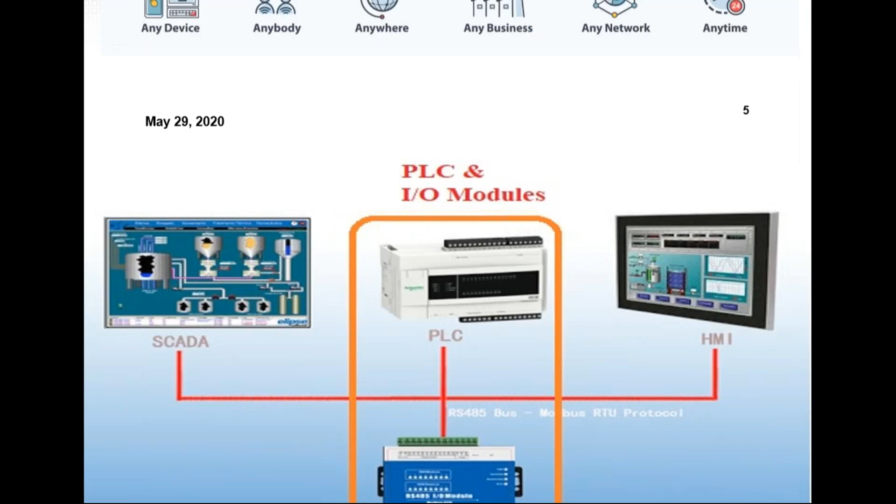Now let us see the conventional industrial automation systems which are in operation up to today. Majority of these sensors and actuators are connected with the PLC through hardware. If we want to monitor this whole operation, we can monitor either in HMI or in SCADA systems. So majority of the control is done at the local end.

So now, because of the introduction of IoT, this particular conventional industrial automation can be converted into IIoT. So what is IIoT?

In IoT, these industrial automation systems can be connected with a Wi-Fi module, also called the IoT gateway module. Through this module, we can transfer data anywhere in the world, to computers or mobile systems, so we can monitor and control from anywhere.

There are many cloud providers available, like ThingSpeak, Google, Amazon, IBM, and many other service providers. So this is the overall structure, or basic components, of industrial IoT.

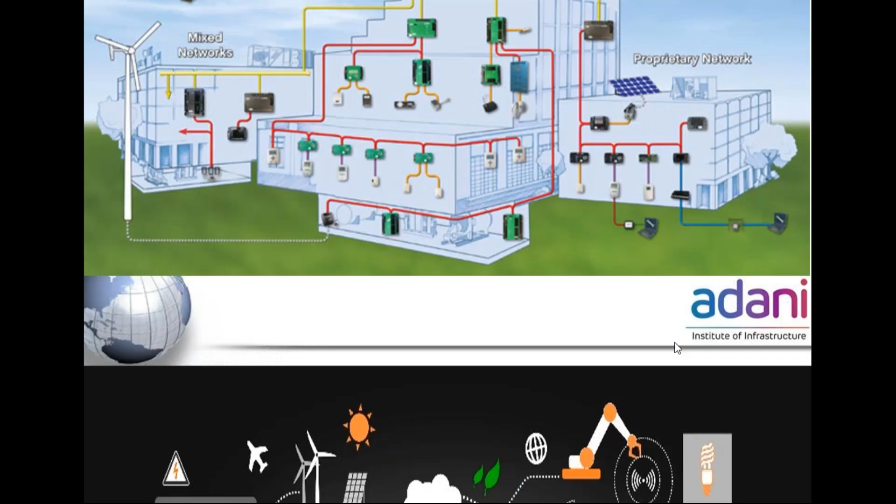We can also have industrial automation. In industries, we can control each and every parameter using this technology. We can control the whole production line from anywhere, monitor quality control, handle inventory management, continuously track and monitor, and also track logistics and different parameters. These are the applications of IoT in industries.

With this, we will be exploring in detail in this webinar. Next, IoT can also be helpful in the healthcare sector, like in this corona pandemic.

It can be very much helpful. We can order anything like medicine, contact doctors from anywhere, order medicines, and monitor patients from anywhere in the world. These are the different benefits of IoT in the healthcare sector.

Ultimately, if we are implementing IoT in healthcare, we can have the doctor at our doorstep. We can call the doctor from anywhere in the world, and we have the major advantage of these disruptive technologies.

Next, IoT can also be used in robotic applications. Nowadays, robots are frequently used in industries. These robots, using IoT, can be controlled from anywhere in the world. These are the potential advantages of IoT.

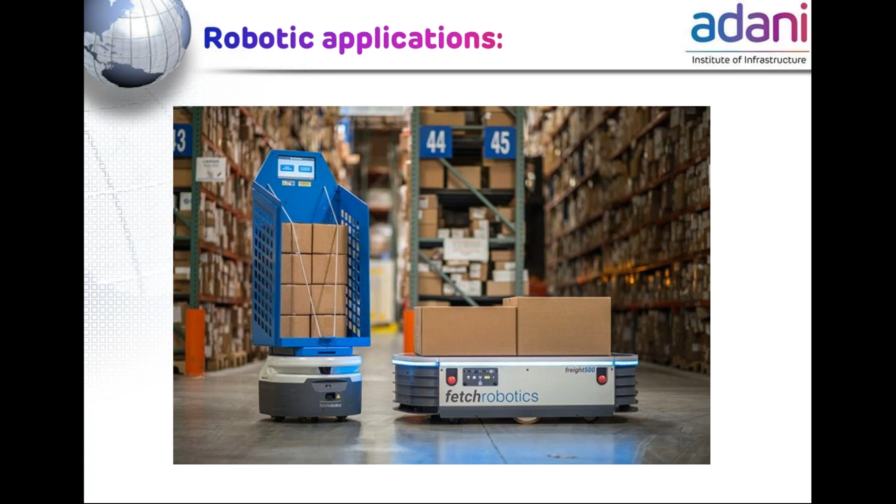So these are the different applications of IoT. It can be used in home, building, industry, healthcare, IoT devices, robotics applications, and many more.

So now we will see, up till now we have seen what is IoT and where it can be implemented. Now we will see the potential benefits of IoT. We can monitor and control anything from anywhere in the world, making our life much easier. Ultimately, the major advantage of IoT is increased productivity.

And we can have the global connect, right? So ultimately, each and every process will be optimized using IoT. So simultaneously, we should also analyze the risk, as whenever we are using any new technology, we should also analyze the risk associated with it. So which are the risks which we must need to consider?

I thought of playing a video. Let me just try it out. I hope the audio is not coming out at your place, so I'm skipping this.

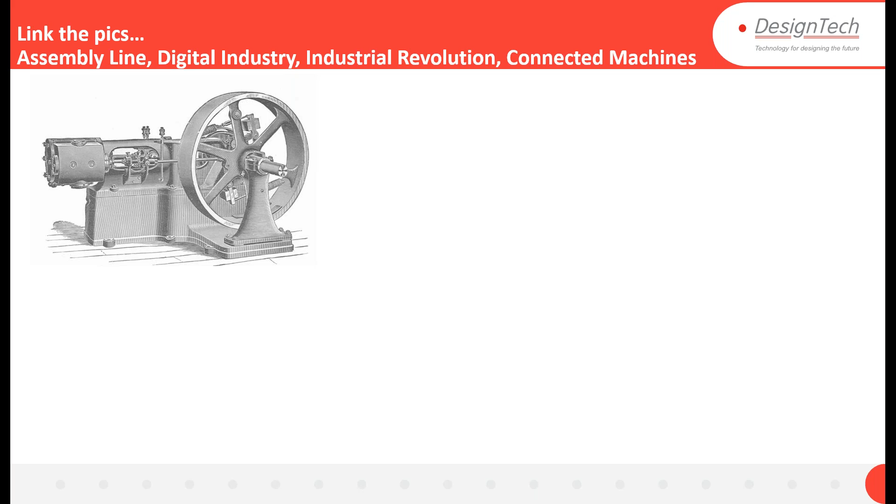You're having some pictures here. You can just answer yourself, no need to tell me. You're having something called an assembly line. You have something called a digital industry. You have industry revolution and connected machines. So which one is the topic here?

For example, the industry revolution. The first one is the industry revolution, after that came the assembly line. Industry revolution is man invented the wheel, and the machine is Industry Revolution 1, and Industry Revolution 2 is assembly lines. Later on came digital industry, where CNC machines or NC machines came into picture with Industry Revolution 3, and 4 is the connected systems.

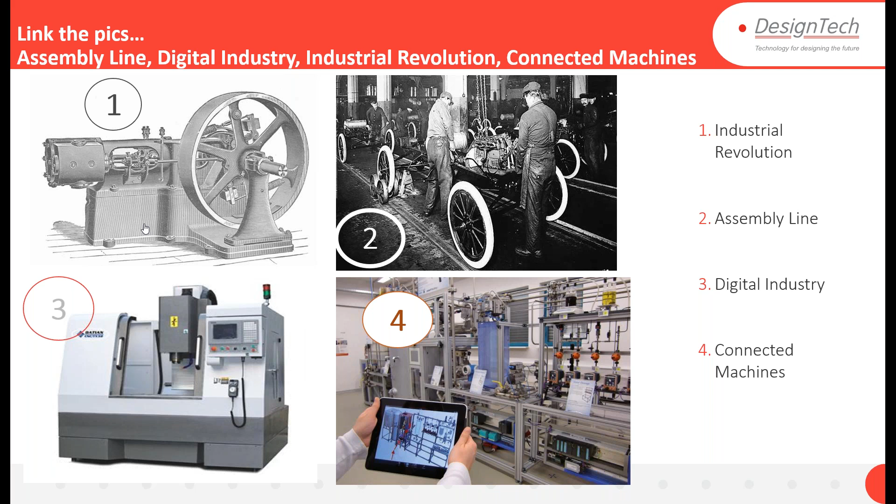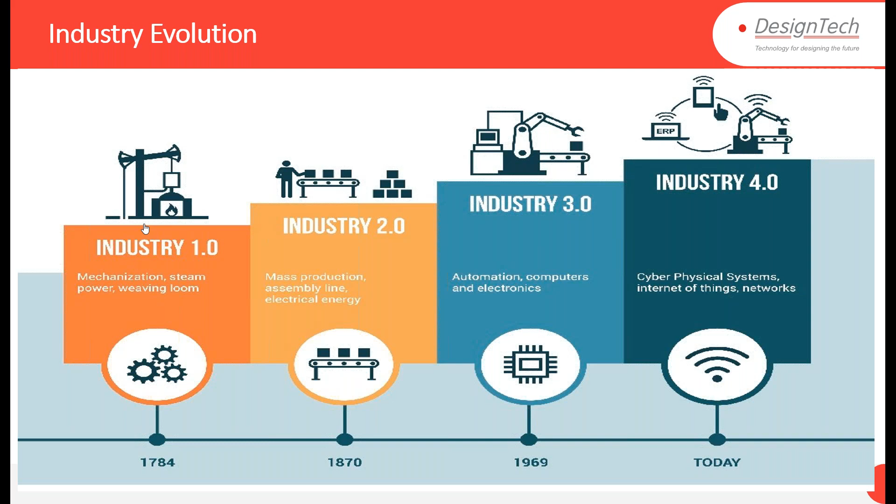Now today we are trying to discuss more on this 4th area, which is the connected systems. So this is somewhat in short about industry evolution, industry 1.0, 2.0, 3.0 and 4.0. Every time the industry revolution has come with some world wars, but good, industry 4.0 is nothing like that. We are trying to just work with cyber physical systems, Internet of Things and networks. So this is what we are trying to work on today, that is industrial Internet of Things or industry 4.0.

So the 4th industrial revolution, we try to say we are witnessing profound shifts across all industries, marked by the emergence of new business models, the disruption of incumbents, and the reshaping of production, consumption, transportation and delivery systems. So whatever Ujjwal Patel sir has told, it is a similar thing, but in a simple format. There's a definition I can give about what is Industry 4.0.

And products are changing. Earlier we used to call a product very good and all, but today we are trying to call it smarter because they are able to listen to us. So before we understand what we want to do, we are able to tell them, and before I understand, they are trying to do it. So that is somewhat what we are trying to use, called smart connected products. So where data analytics, design for connectivity, additive manufacturing, augmented reality, these are some of the things which are coming out.

As per various studies, Industry 4.0 is real-time high data volume availability through multilateral communication and interconnectedness between cyber physical systems and people. Where digitization and new technology, when we are trying to merge these two processes - people think that just connecting two systems is called Industry 4.0. No, that is called digitalization only. When we are trying to include some new technologies here, like manufacturing technologies, then we call it agile manufacturing, or Industry 4.0.

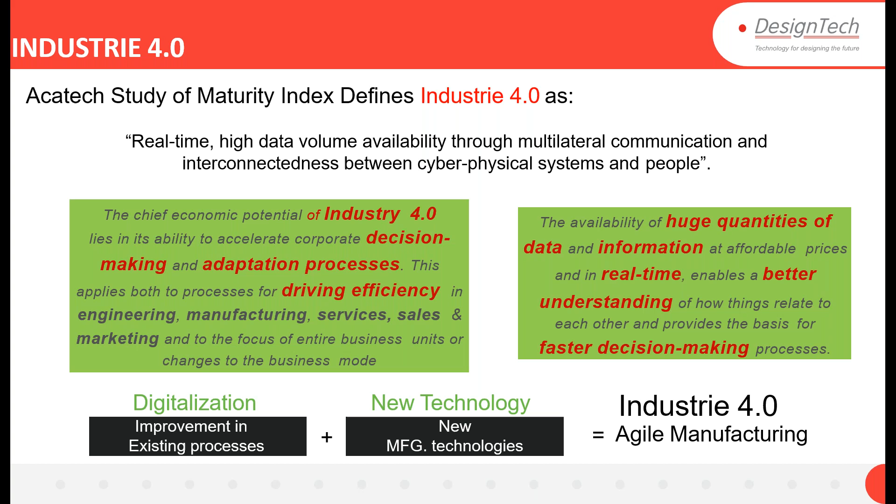In short, you can just look for yourself. Before lockdown, work from home was not really happening in those days, before March or so. Now we are having some special packs called work from home packs, which have been introduced by most of our service providers, and we are trying to consume each and every bit of data. So that is what data is getting consumed today, that is what we are trying to work with.

And the challenges and manufacturing expectations are rapidly transforming because workforce productivity has to be increased. Increased productivity and the operation complexity is going up day by day. Capacity utilization, that is each and every asset optimization, has to be done.

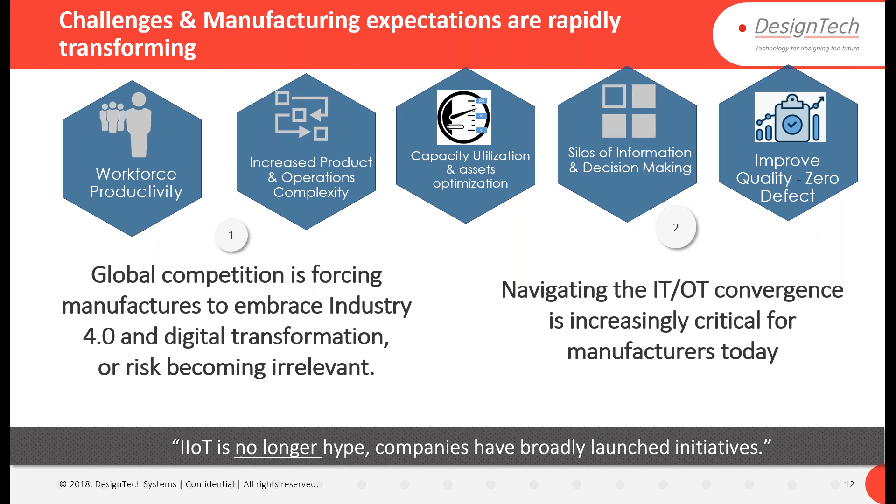With Industry 4.0 and navigating towards IT-OT convergence, we are trying to work today with the latest technologies. IIoT is no longer a hype, and companies have to start working with IIoT, Industrial Internet of Things. Every part of the country is coming out with smart manufacturing, as it's called in the US, or Industry 4.0 by Europe, and Made in China 2025 by China. About 33% majority of companies are coming out with IoT economic value. This is what factories are setting up today.

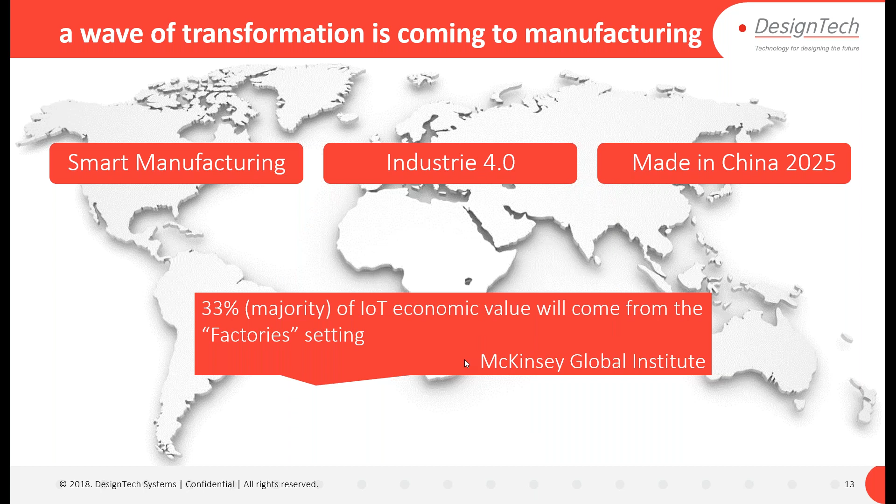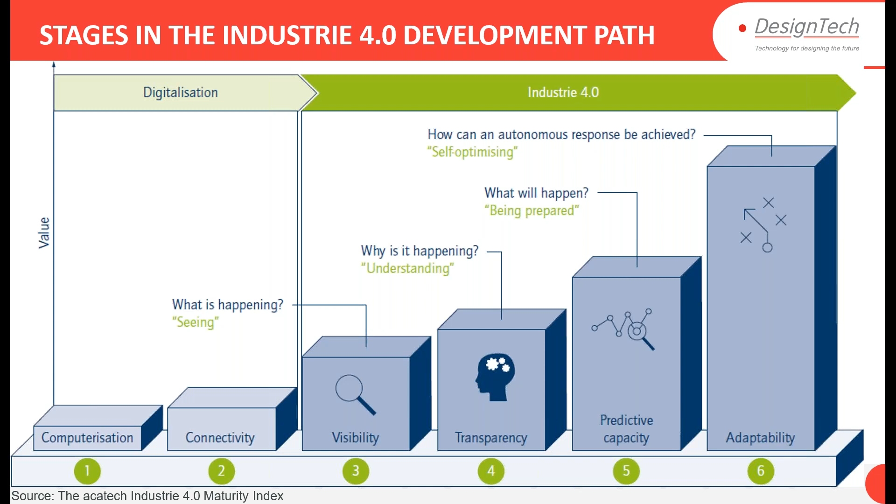So here are the stages of how we come out with the Industry 4.0 development path. The first is digitization, where computerization comes in, and the next stage is connectivity, which is the digitalization part, followed by visibility, transparency, predictive capacity, and adaptability. This is how the phases of design go on. These are the stages of the Industry 4.0 development path.

Connected devices of Internet of Things allow you to connect anything - it might be a service provider, operations, distribution, markets, just name a thing. Everything is connected today, and that's where you get the information. From my office, I can operate my AC at home also. To that level of connectivity, it has come today.

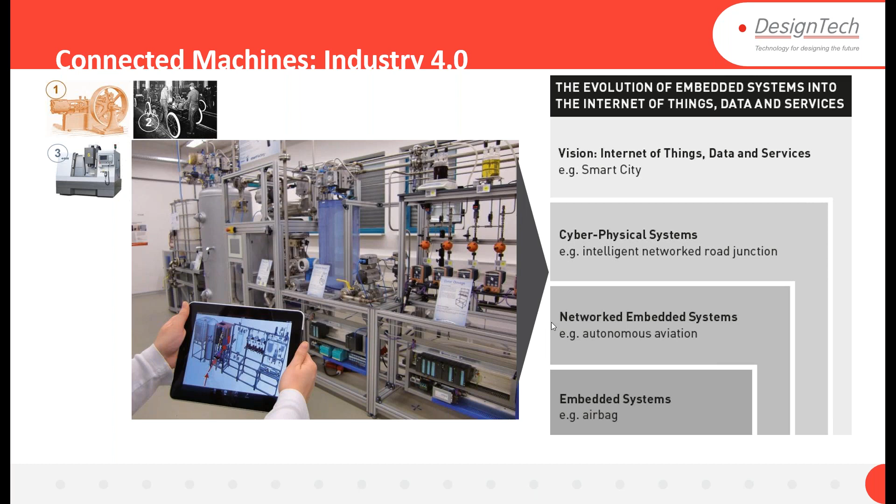So connected machines in Industry 4.0, involving embedded systems or networked embedded systems, cyber physical systems, and vision Internet of Things - these are the levels of evolution coming out within Industry 4.0.

So digital transformation - till now I've discussed something about what IoT or Industry 4.0 is. Now for digital transformation, let's discuss PTC. PTC stands for Parametric Technology Corporation, which is a global leader. Today across the globe, as per revenue, it was about 1.4 billion revenue in 2018 itself, and today you can just expect more.

We are into various verticals, not just one particular vertical. We are in automotive, aerospace, federal aerospace, electronics, industrial products, life sciences - almost every vertical we try to operate in. This is PTC globally. They are the leaders here today.

We have the breadth of PTC solutions. We have a 3D platform called Creo, where we can do any type of designing or modeling - large assembly models or whatever you want, using the 3D platform. We have PLM, product lifecycle management, using Windchill. Today we are mostly going to concentrate on the last two: the industry orchestration platform, which we call ThingWorx, and the experience platform, which we use with augmented reality. These are the two solutions we are going to discuss for Industry 4.0.

When products are getting changed, for example, a product is created first, then the second stage is the product should be smarter, and later I think it should be a connected product, because just going to a product and trying to understand information about it is a bit old. Now I want to make the product a connected product, because it has to connect to my system.

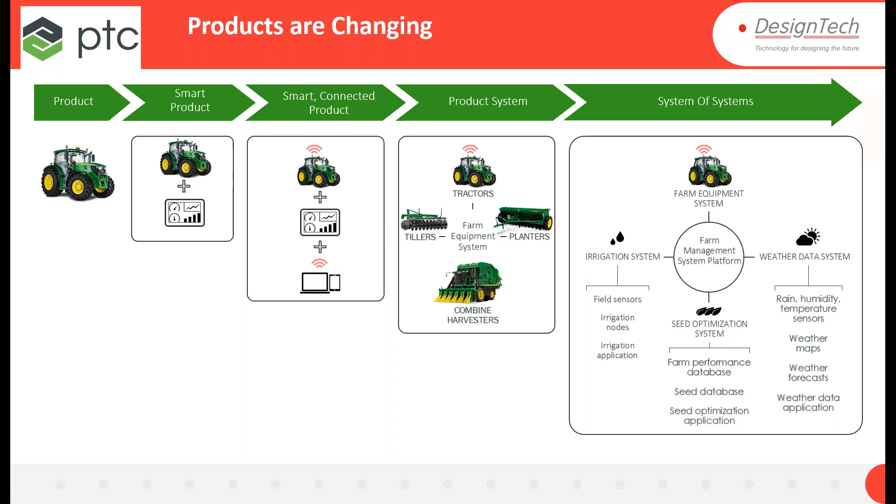But now we are trying to make it a product system here, in the sense it might be farm equipment, planters, combine harvesters or tillers, which are going to get connected to your tractor. And the bigger equipment, when it comes to the system of systems, this is the level where today we are trying to work. We are not trying to work with one machine or two or three machines, we are trying to work with a company or an enterprise. So to this level, the products are getting changed, the requirements are getting changed from the teams, or the companies. I'm not trying to focus specially towards only education here, as we have the teams from education as well as from the companies. So that's the reason even the companies are facing problems, and that's why we are trying to bridge a gap between the colleges and the industry here.

Especially for Adani, I'll be handing over to my colleague Pritesh Kusumkar. He is going to tell about THINGWORX platform, which is specially a connected platform using IoT as a solution. So over to you, Pritesh.

Thank you very much, Raju sir. Good morning, everyone. So I will take you through a solution called THINGWORX, which is an IoT solution from PTC.

Just a second, there are a few people who have raised their hands, so check the chat box. No sound, no sound. At what time? Yes, 10:30. So I hope everybody is getting sound. If anyone is not able to hear, please let us know. Ujjwal sir, is it okay? Yes, able to hear, sir? Yes, it is okay to me. Right, sir. Actually, one with this, Mr. Nitin Jain, and a few people, I think three of them, were not getting audio. Okay, so we'll just go ahead now. Yeah, thank you, sir.

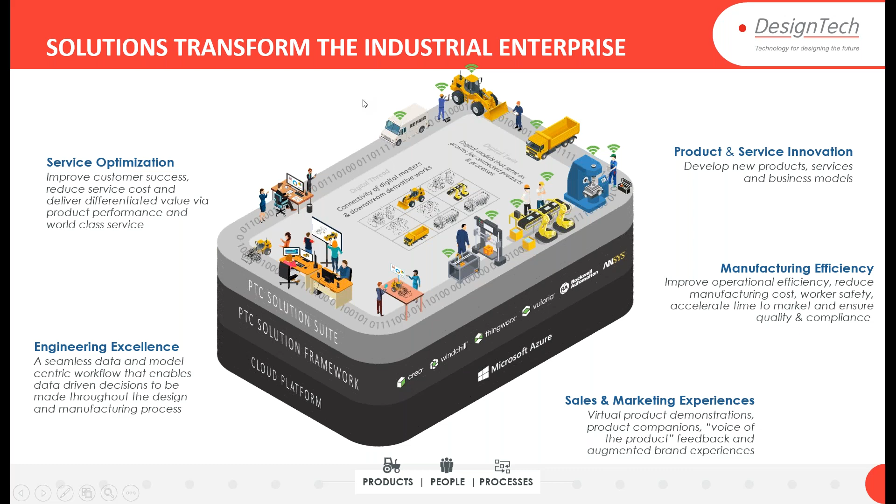PTC's solution framework starts from your CAD design to managing your product data using PLM, which is a Windchill solution. Then you have the IoT solution THINGWORX, and for augmented reality experiences we have Vuforia Studio. Again, PTC has partnered with Rockwell Automation and ANSYS as well, and as I said, for cloud platform, PTC is partnered with Microsoft as well as Amazon Web Services. So here is the breadth of the PTC solution for the industrial IoT platform - right from acquisition of data from your IT and OT systems, then contextualizing that data with your existing systems, you might have some existing system for ERP, PLM, MES, or any other system you might have.

So whatever data you are getting from your IT system or your OT system, to have proper contextualization, you can extend to other systems as well. Then have the capability of visualizing all the data which you are acquiring, and performing analytics on that data.

Then business process flow, UX composition, designing different UIs as per your requirement. Then domain specific logic compositions. Each and every business has different business logic, so you can apply that logic to your applications. Then domain specific data model composition, industrial protocol translation.

Nowadays there are very disparate data availabilities in each and every industry. No industry is relying on a single vendor for their equipment. They might have multiple equipment from multiple OEMs. So all these disparate data can be connected, and protocol translation can be done using this solution. And again, digital content management and remote access is one of the capabilities.

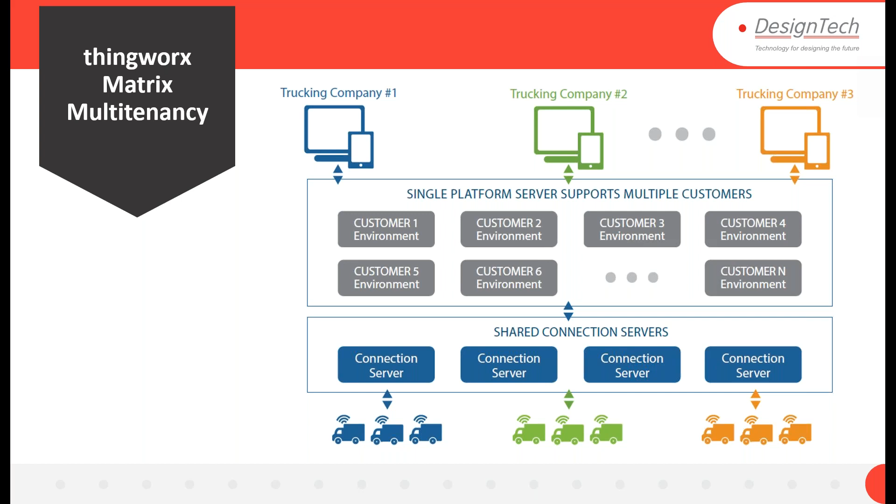A connection server supports up to 10,000 connected devices. If you exceed that limit, you can have another connection server connected to your main server, and then your applications. Here is another example for an application in healthcare - your original equipment manufacturer may have its own environment, then it may have distributors for sales and service, and after your product is sold, it may have different applications in different places. So all this data you can manage in a single solution or platform.

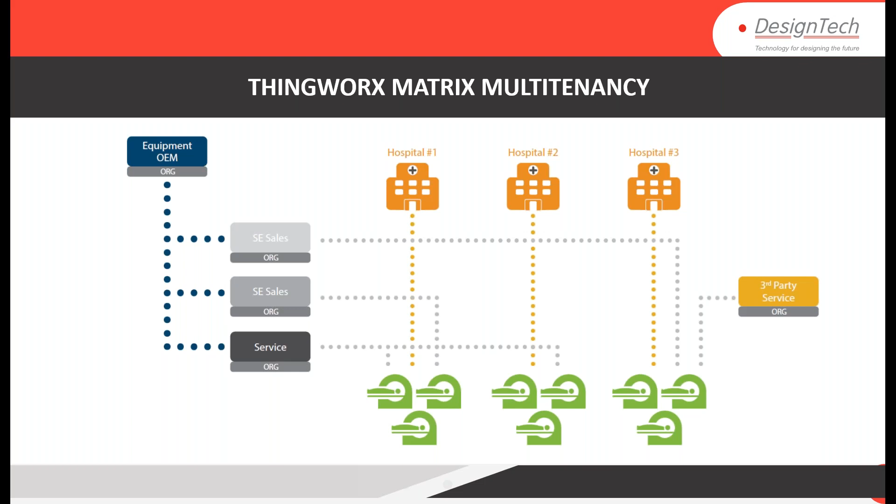Then the third stage is analyze. For analyzing any data, you require different levels of human input to take action. Whenever you have visibility or real-time insights over your data, it's not the case that the machine will automatically take decisions for you - it requires some time. So ThingWorx has inbuilt capability of machine learning algorithms.

So you can create your ML model and have predictions using that, but for that you initially need to provide some inputs. There are four types of capabilities: descriptive analytics, where you can see what is happening; diagnostic, so why it is happening; predictive, if something is going abnormal or an anomaly is happening, what will happen; then prescriptive - based on the predictions, what will happen, you can take decisions and take actions - so what should I do.

And this is a feedback loop. So after having prescriptive analytics, you can take a decision, take action, and validate that action using machine learning algorithms.

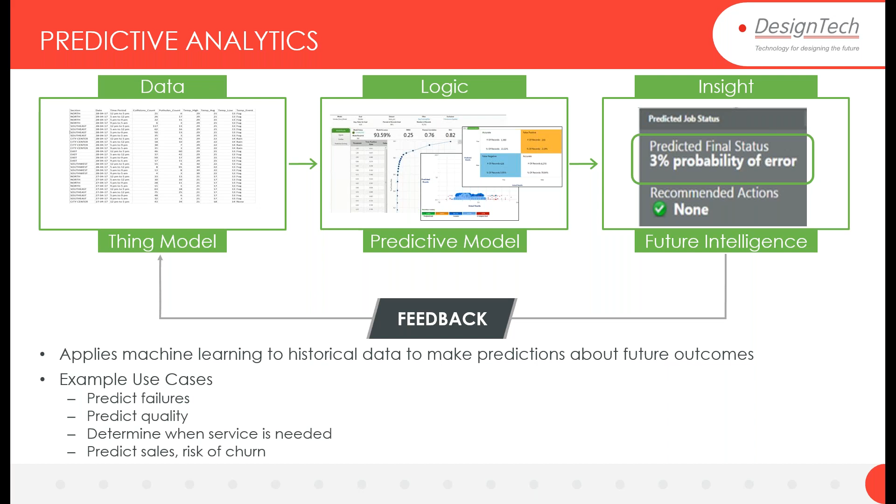Whatever actions are taken after the prediction, you can validate those actions, and if they're not good enough to increase efficiency, you can change them again and have the feedback loop repeat. So it applies machine learning to historical data to make predictions about future outcomes. Example use cases are predicting failures, predicting product quality, determining when service is needed, predicting sales, and risk of churn, etc.

So, simple analytic model for creation and deployment. Analytics builder has a user interface for simple and intuitive interaction with all your data. It exposes complex relationships in data as simple, understandable information, simplifies the advanced analytics process, and helps interpret information faster, saving valuable time, and publishes the model for use in your IIoT applications.

Then analytics manager is there to define and trigger analysis events within the application, map incoming data to a model created with THINGWORX or externally, and map analytic output to applications.

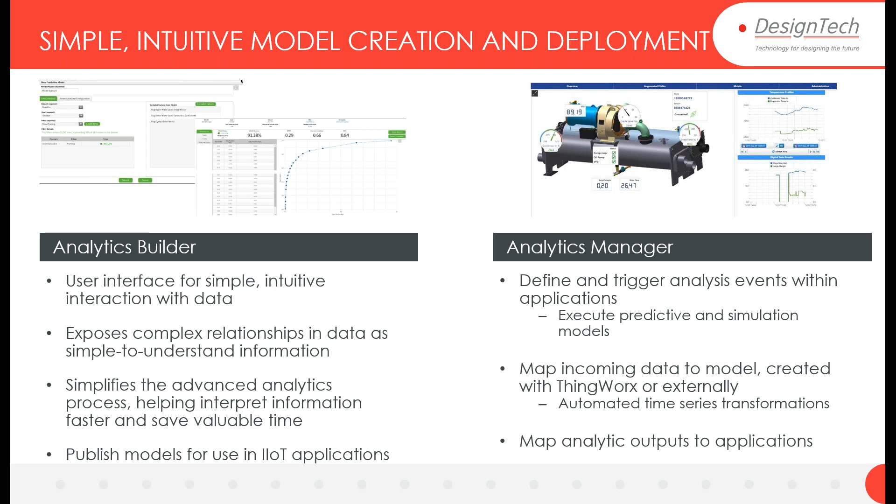Then we have this manage phase where you manage all your data to extend your THINGWORX platform to different applications. You might have ERP applications, you might have MES, you might have CRM applications, or you might have different devices. So THINGWORX can extend to all these applications, and you can connect to them.

You can manage all data from these applications using MQTT or REST API, and visualize all data for different departments in your organization. So, how does THINGWORX flow work?

THINGWORX already has a library of connectors for different third-party applications. Here in the image you can see all the applications, or if you go to PTC Marketplace, ptcmarketplace.com, you'll be able to see what different connectors are available.

Then you can create a workflow, like triggering on any alert, specifying what property information you should get, and depending on the information in that property — let's say, in this example, if fuel is less than 10%, it will automatically create a refuel service case, which will send a notification to the operator who will refuel, and after validating whether it's been refueled or not, it will complete that workflow.

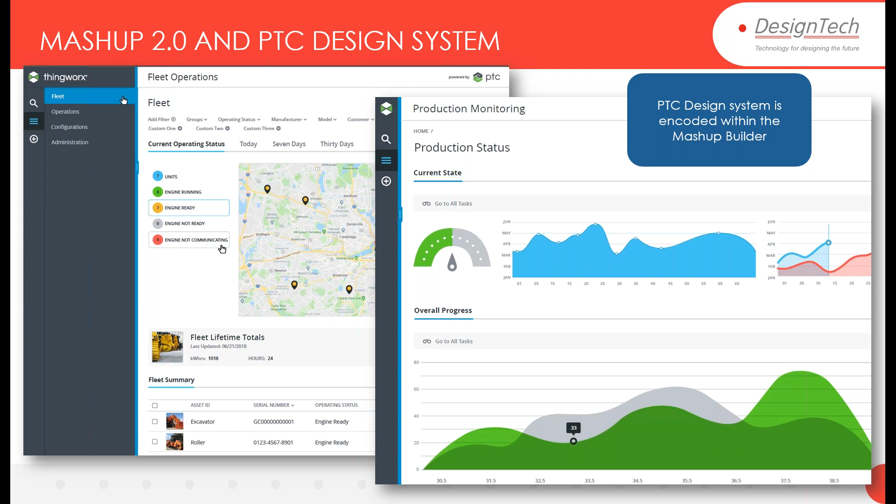There are 65 plus out-of-the-box widgets available, like dial gauge, LED gauge, calendar, or time series chart. You can even integrate with Google Maps or Open Maps, and many more widgets are available, which are simple drag and drop operations you have to do to create your mashup. Then we have the responsive layout as per your screen resolution.

You might have a responsive layout where it will get extended as per your screen resolution, or you may have a static layout which will be fixed. It's very simple and editor based. You can set orientation, justification, and other operations available in major applications like Word and PowerPoint today. Different types of distributions, stretching, wrapping, size growing and shrinking rules are available there. So it is very easy to use.

Here are some sample mashups available.

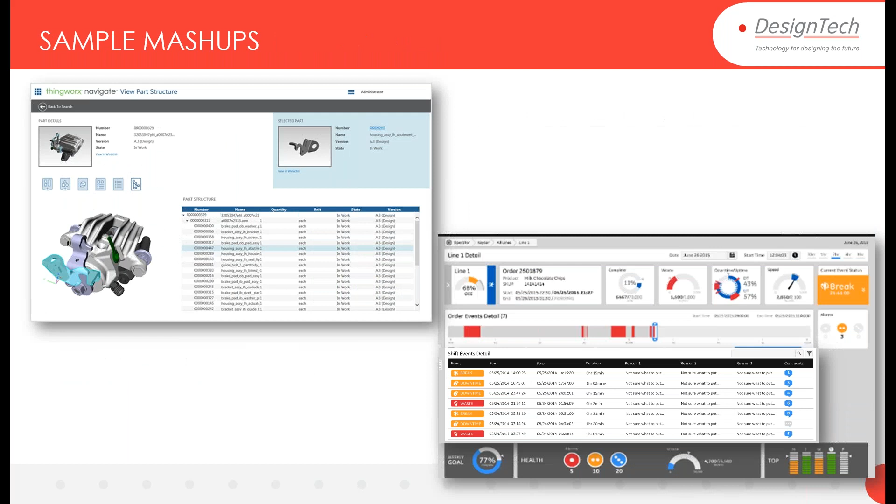So this is the architecture. On the left hand side, as we discussed in our connect phase, for connecting any products which work on the field, called smart connected products, we have the Edge Micro Server for your edge devices. Then THINGWORX Edge SDKs are available, and connectors from Axeda are available. Again, if you have any IoT gateway which is programmable, using any programming language it supports, or which you are good at, you can use that to get connected to your devices.

For industrial devices like controllers, PLC, sensors, historian data, or even DCS systems, we can use THINGWORX KEPWARE server. You can also get connected to your CAD system, PLM, or BIM using our available SDKs. For managing all that connection, we have the THINGWORX connection server, THINGWORX Composer, THINGWORX Mashup Builder, and Persistence Provider. All these components become your THINGWORX foundation, which is the THINGWORX platform. Composer, Mashup Builder, and THINGWORX Flow are components of this platform.

Again, using whatever data you're getting into your platform, you can use that data for analytics in THINGWORX Analytics. Then you can create AR experiences using Vuforia Studio. In later slides, my colleague Mr. Santosh will take you through the augmented reality.

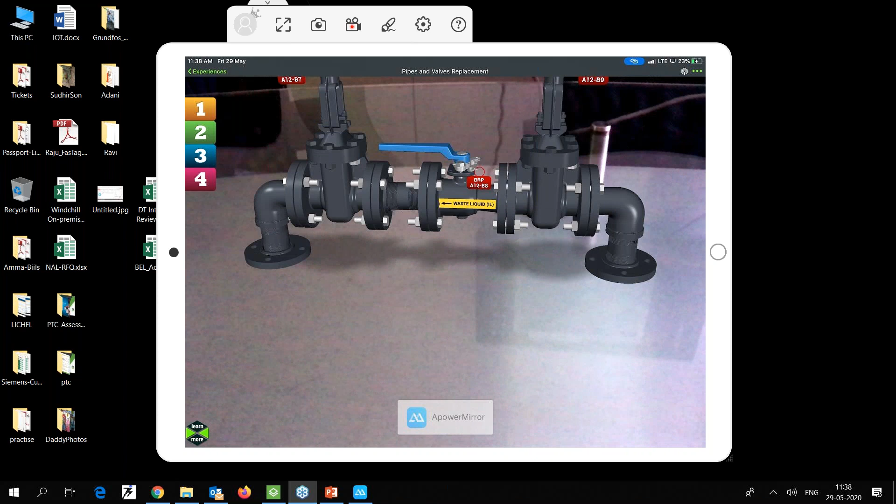So we have... I have... it has not yet come. Now I have opened an experience which is a pipe and valve assembly, right?

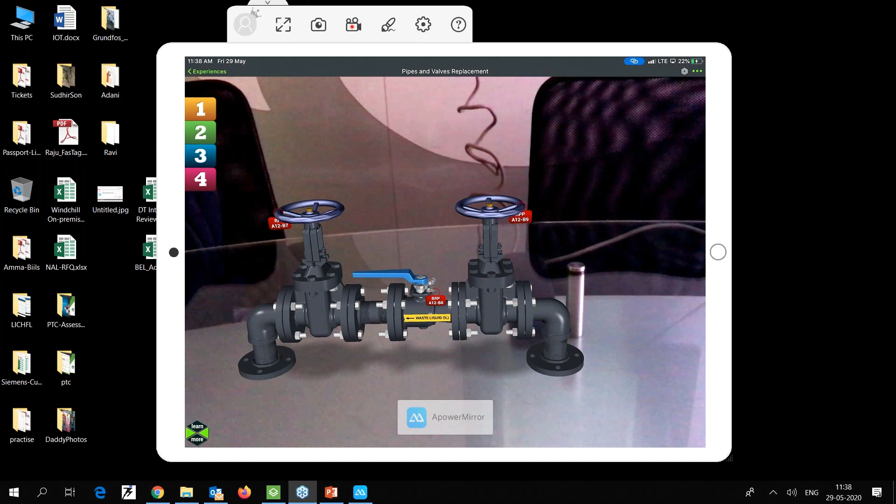Okay, so now we have this user experience where we have certain buttons created. What happens is that some issues has been reported that some pressure drop has happened to one of the valves, based on the sensor data received, right? So I'll just go to that so that they can see those numbers.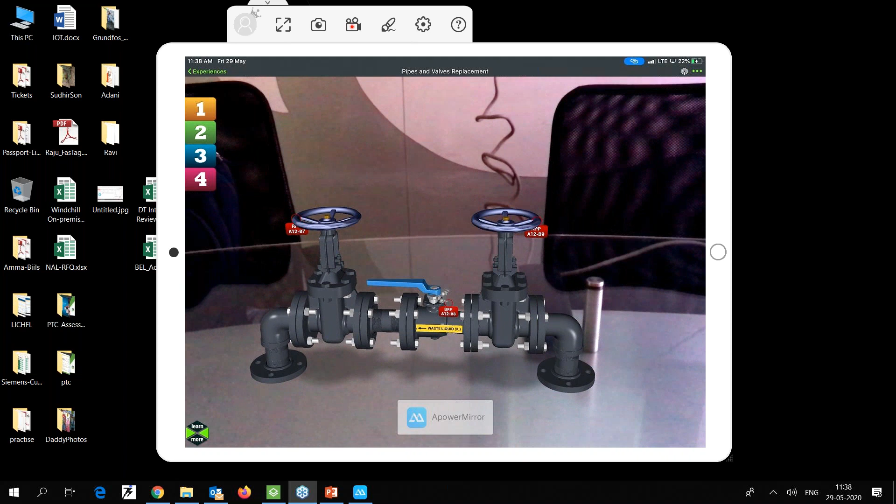So now before going for that maintenance work or the servicing work, I should be able to find out where the problem is, right? And also I want to be prepared what could be the possible solution for that problem. So now I have just opened that data in AR, or that viewer, and I will get the real data of the sensors, right? So this is one of the advantages when you are using PTC solutions. I will get the real sensor data. So based on that, I will get to know where the problem is, right?

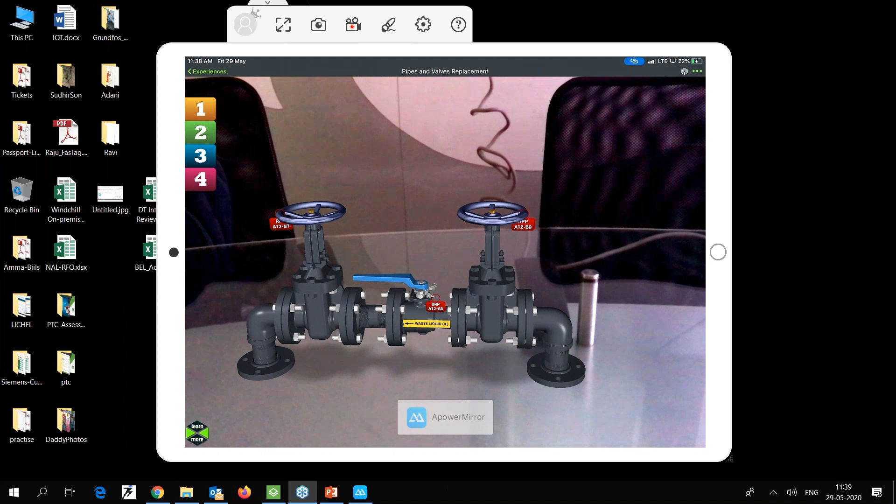Now I'll just click the button, the first button, and I will just locate where the problem is. Just be patient, I mean, it's a little bit slower. When we are trying to just work live, actually it takes some time for you to have a display. So that's the reason we're just waiting.

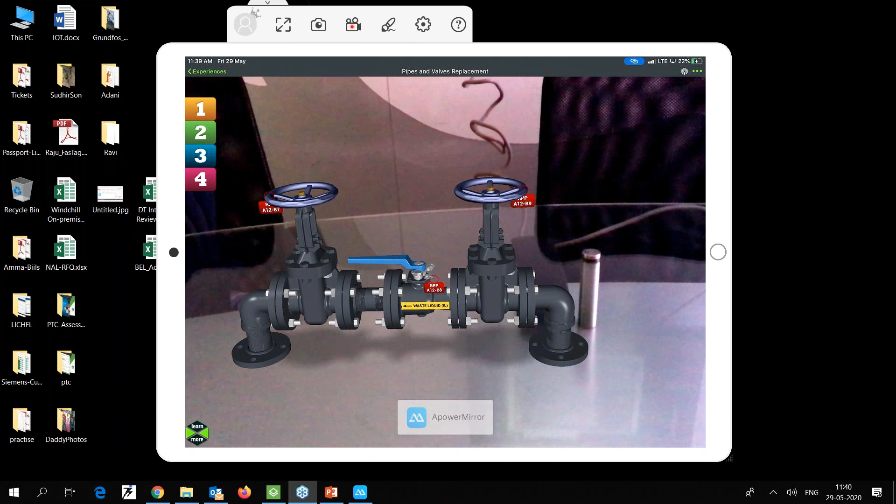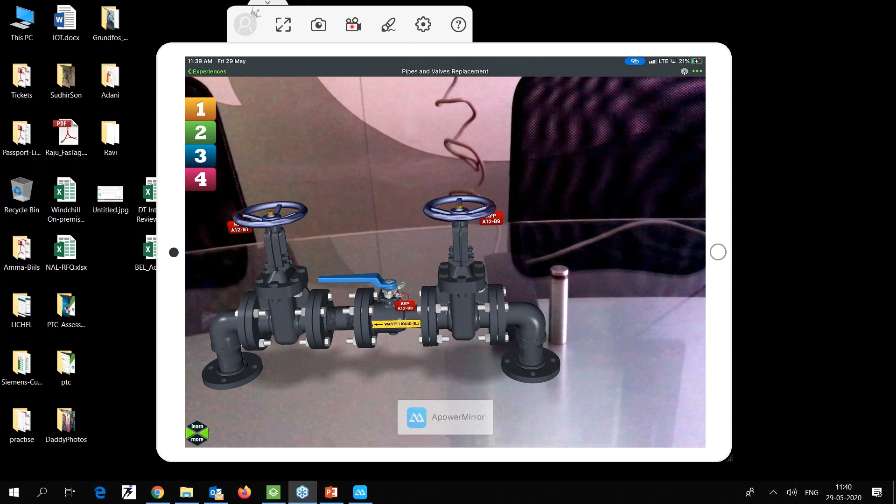Are you able to see something? Some widgets? I can see your tablet screen, and that pipe and valve or something. But nothing is coming beyond that, right? Okay, what we'll do?

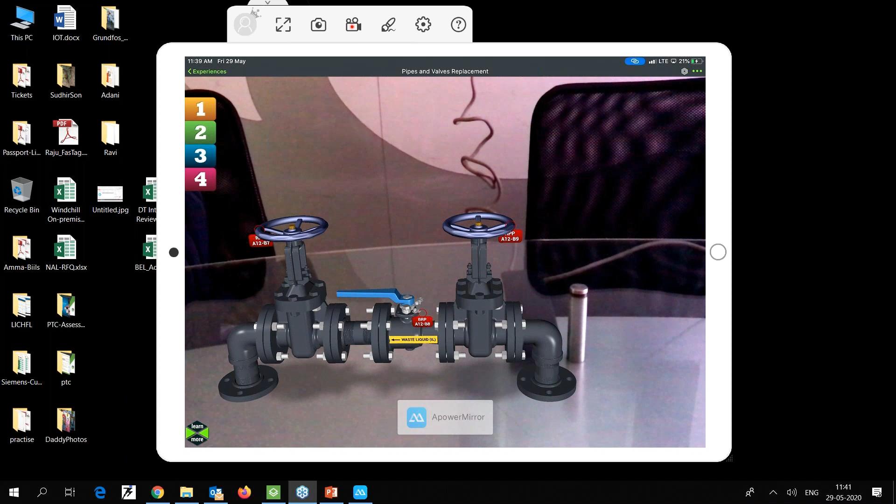On top of the screen, I can see different widgets, buttons are there, 1, 2, 3, 4. Now when I click button 1, are you able to see something on the right side? No, nothing is coming out. Now it is coming, right? Now it has come. Locate.

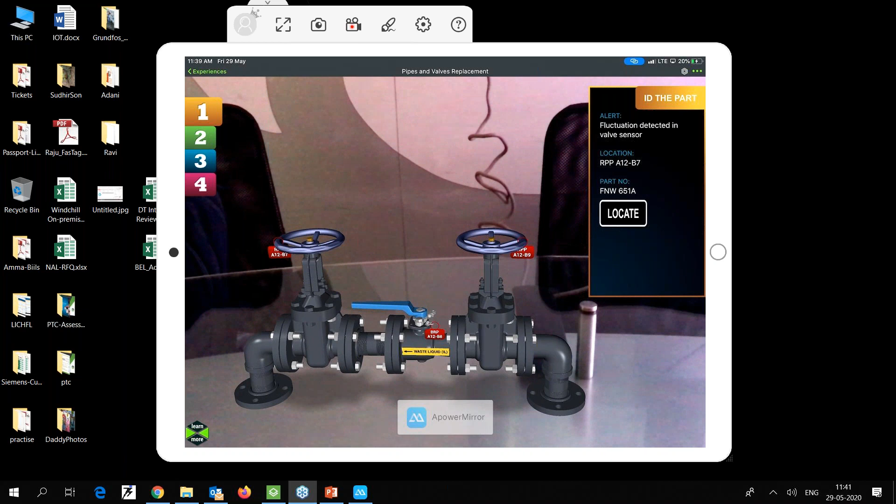So based on the issue, I just click where the problem is, so I'll locate by clicking on that. I need to know where the problem is. It's slow, so I'll go with the second button and click on analyze. Just wait for some time.

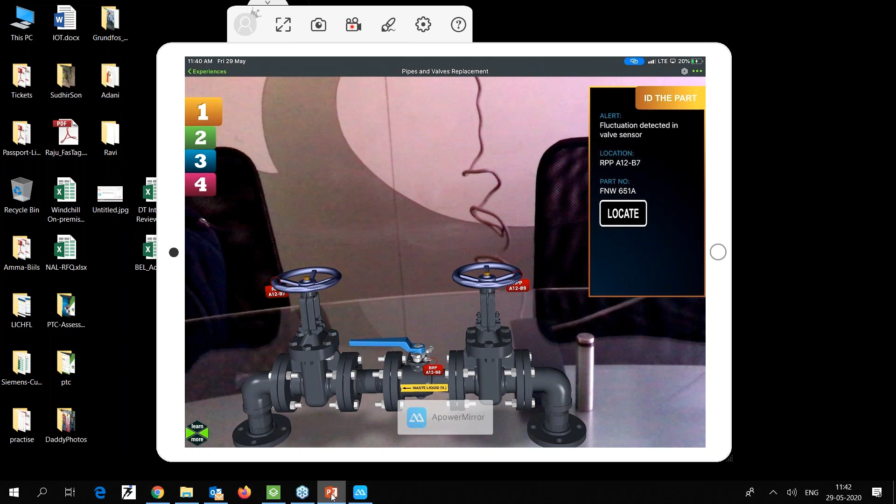Let us go back, maybe we'll focus it once again. We'll just go ahead with the presentation. I'll go with the presentation, then maybe from the software I'll show you how it works. Maybe because of the connectivity issue we are not able to do that.

Now when we are talking about augmented reality, we have a physical thing and a digital thing. Physical means machines, hardware, many things that come under the physical category. The digital is maybe sensor data, or CAD data, or any data in digital form. Take the example of the pipe and valve assembly.

We have physical data in that form, and we have digital data in CAD form, and also digital data as sensor data. Before augmented reality, or before IoT, both were separate, so the data coming from the physical thing was not properly used to gain more productivity or benefit. Now what AR is doing is taking the sensor data or physical data from sensors and merging it with the digital data.

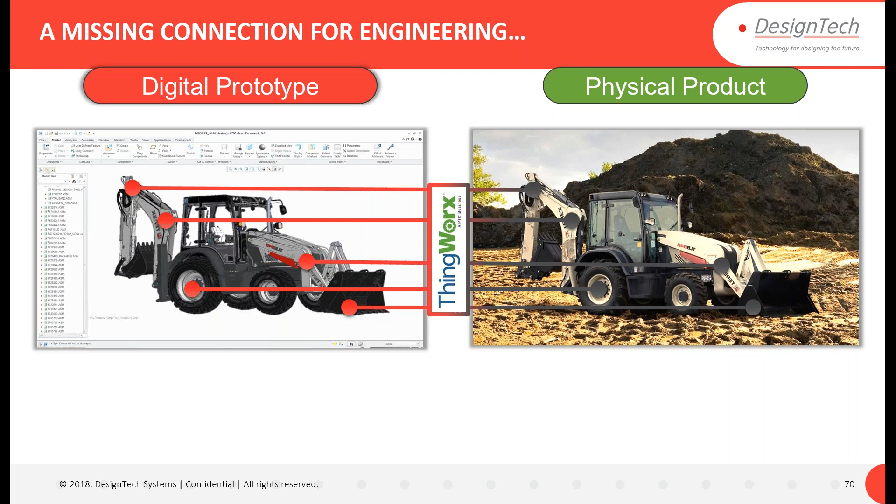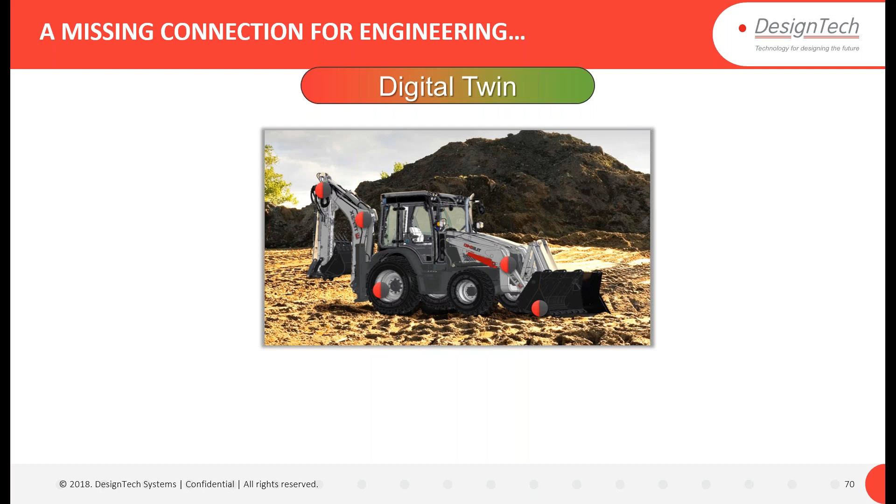Now, as I said, we have CAD data and physical data. So if you put sensors on the actual physical data, the same data can be accessed through Internet of Things, and can be used for betterment of the product, or maintenance, or servicing of the product. So basically we are creating a digital twin by using Internet of Things.

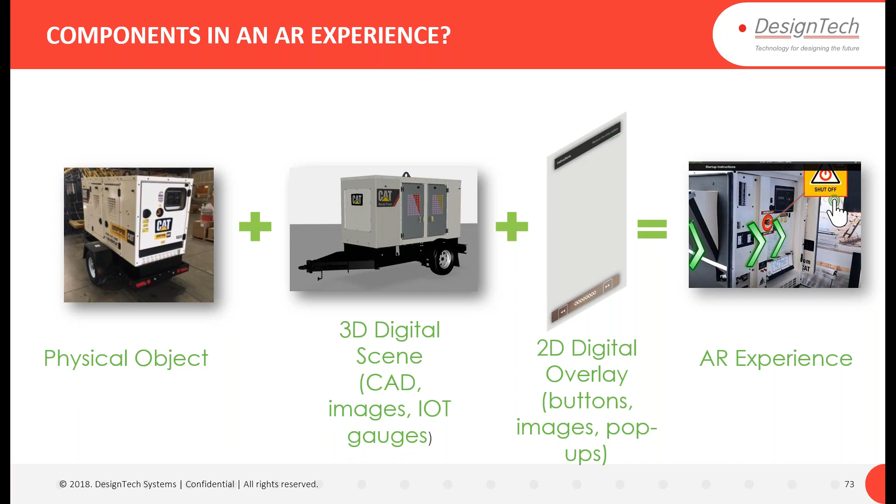So the solution from PTC for this is Vuforia Studio. I'll just skip this.

Now, Vuforia Studio, as I said, is a solution based on a drag and drop user interface, where we add buttons or widgets. The best part is, if you want a basic experience, you don't have to have development skills. But if you want to go for something more complex, then you can use your software skills to develop that kind of experience.

So as I said, the user interface design is very simple, with a drag and drop interface. You can create content like maintenance work instructions or training instructions. You can use animations created inside the CAD data, or you can create animation inside Vuforia Studio. You can use sensor data, bringing it inside this experience, and the output can be in multiple forms where end users can access this experience to view the augmented reality on their particular devices, maybe Android or iOS devices.

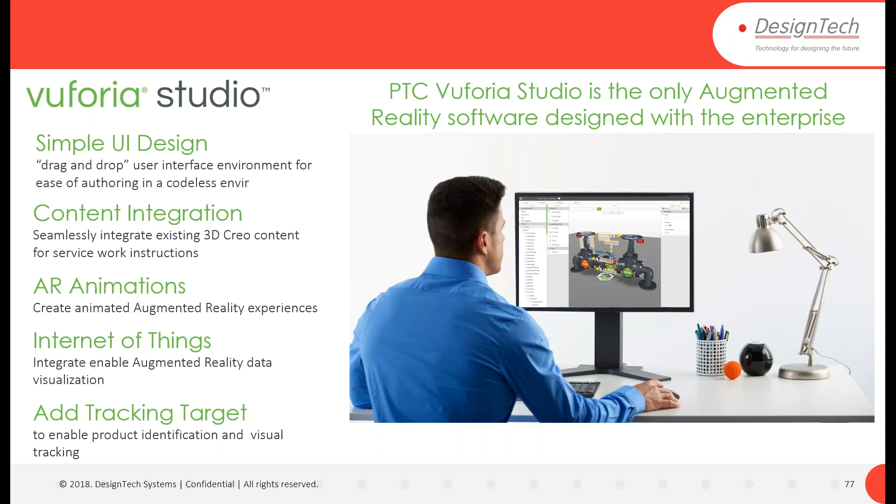When you talk about the features, built-in widgets are there. Before publishing the data for the end users, you can also verify the experience you have created, or maybe you want to do some modifications on that experience before making it available to the end users. There is a very simple way to publish - you don't have to do anything, just single click on the publish button. It will publish to that server, maybe cloud or on premise, and the end user can access it through a QR code or some logo.

If you want to do some kind of styling, some CSS editing is also provided with that. And as I said, if you want to do some kind of complex AR experience, then you can go with JavaScript.

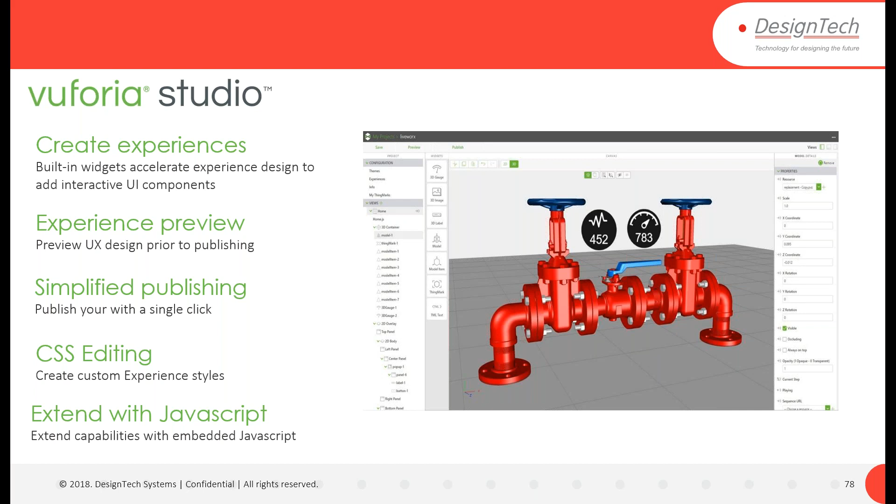So how does it work? We design the Vuforia experience inside this Vuforia Studio by using CAD data or whatever data is needed, and we publish the data to the cloud - PTC provides Amazon cloud, but you can also go with your own cloud. The data can be published there, and the author will make sure the data can be accessed through some kind of target tracking.

So what the end user has to do is download an app called Vuforia View from Google Play or Apple App Store. When the user opens this app, he will be asked to scan the ThingMark or a special target, and that model or experience will populate, and he can interact with that experience. So this is how it works basically.

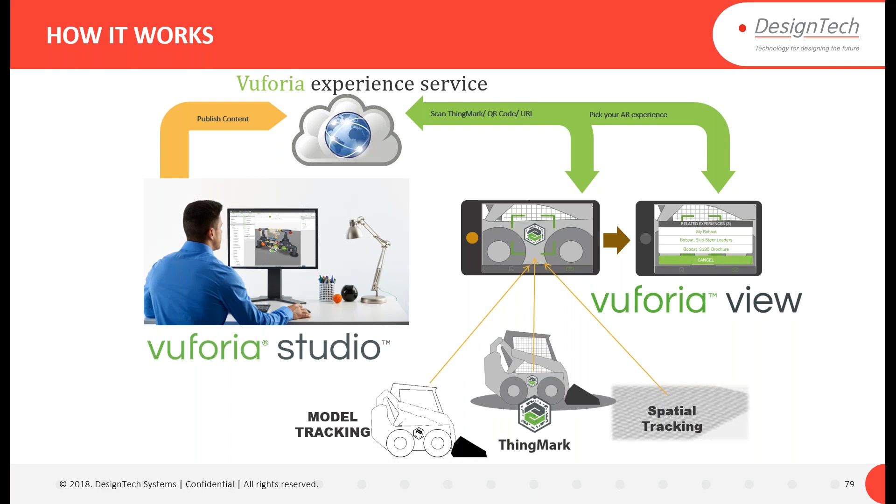Now when I say the experience will be created, how do you create it? You just open the software, do logins and create the projects. You insert that CAD data and create a 2D canvas where you create all these buttons - insert all the widgets by drag and drop. You bind the buttons, the widgets, with that event of the model.

Suppose you want to play an animation inside that CAD model, so you create a button like 'play the animation'. I create a button called play, and I'll attach this button to the model animation. I'll bind that button with that event of the model, and when I click on the button, the animation will be played. You decorate your user interface with color or some CSS styling.

And you can publish that experience to the cloud server, and then the end user will access the data. So this is how the experience can be created inside this Vuforia Studio.

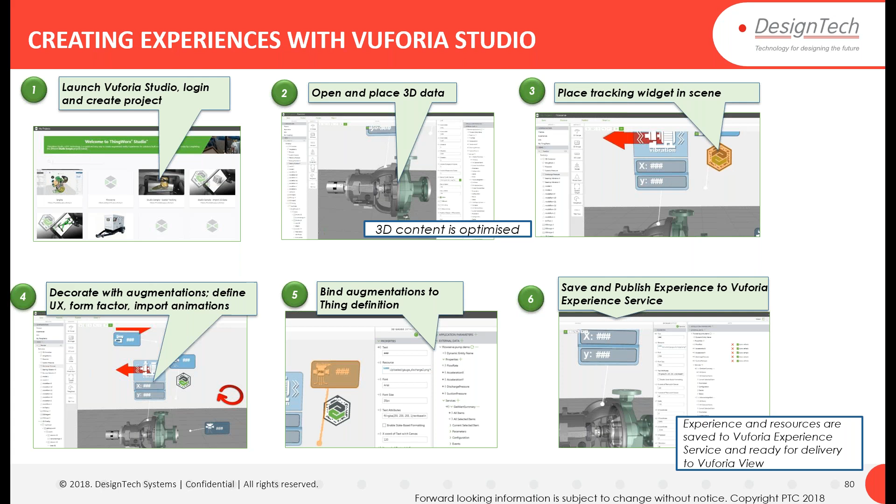We have two types of interface, 2D interface and 3D interface. For this example, we were trying to show this experience - we have the 2D interface created with lots of buttons. When you click some buttons, some event occurs and something populates on the screen.

In this case, what we are doing here is basically locating where the problem is. After finding where the problem is, we analyze what the issue is. We see that there is some pressure drop at that valve. So now we come to know there is a pressure drop - so what to do now?

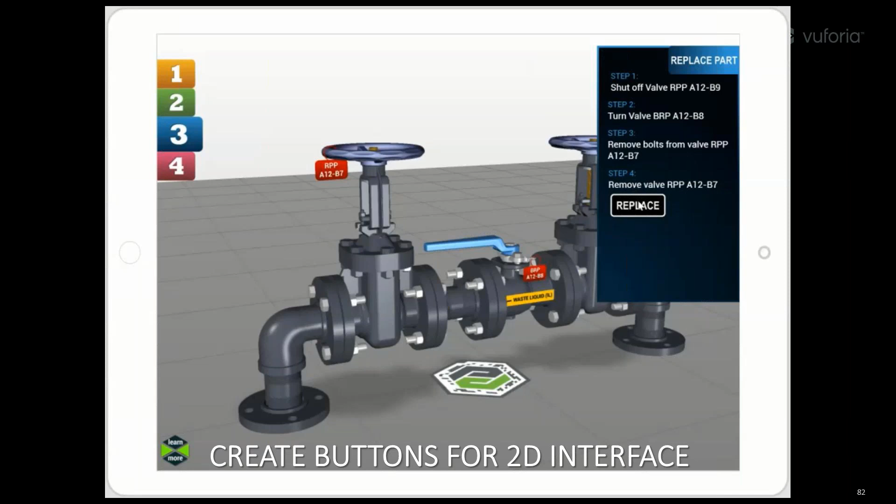As I said, before coming to that location, you will be well prepared - what could be the possible solutions. So one of the solutions is replacing the valve. Now sometimes a skilled technician is not available, and the technician who is going may not be very skilled. In that case, instructions for replacing the valve have been created in the form of an experience, so he can replace the valve by following these instructions.

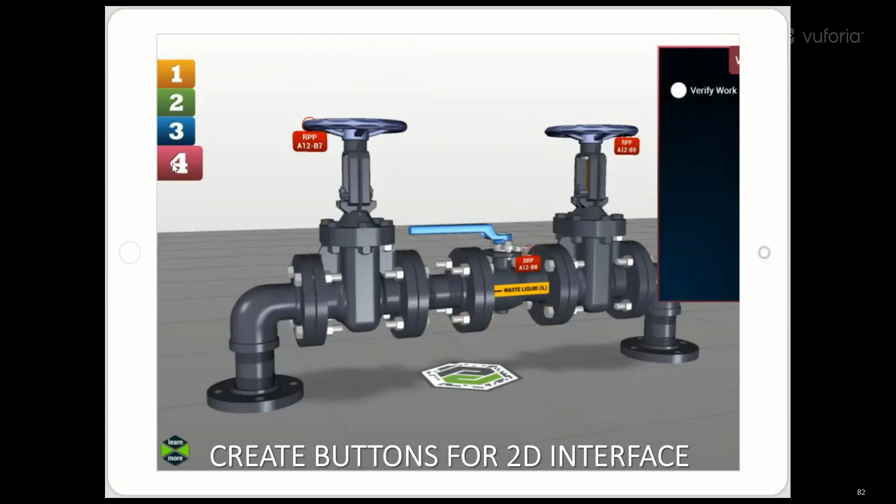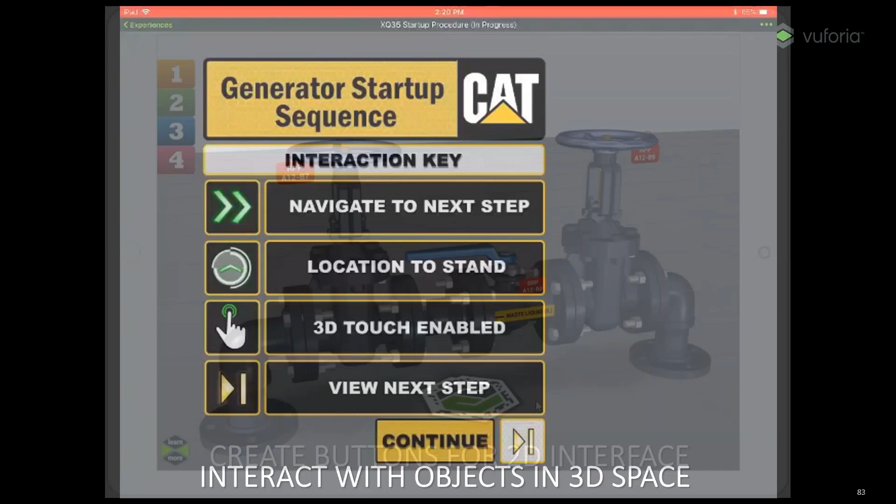First you have to close that valve, then stop the liquid flowing, then he can replace the valve and verify that the part is okay and everything is fine. That way he can experience the AR experience and do the things - the use case in this case was servicing.

So here is an example of 3D widgets. When you scan the real object, 3D widgets will be populated, and now we can...

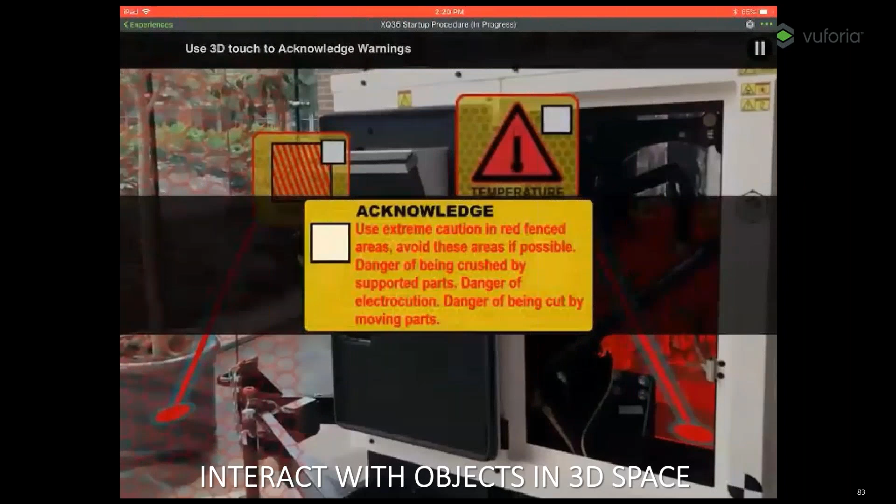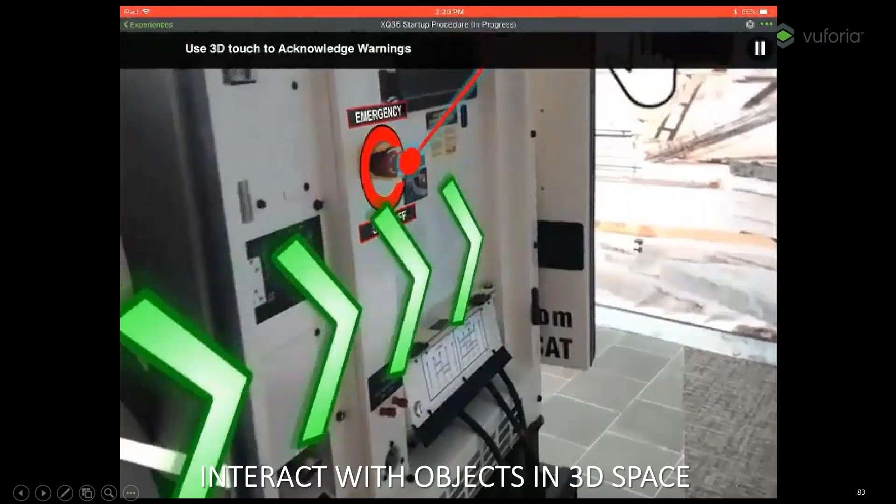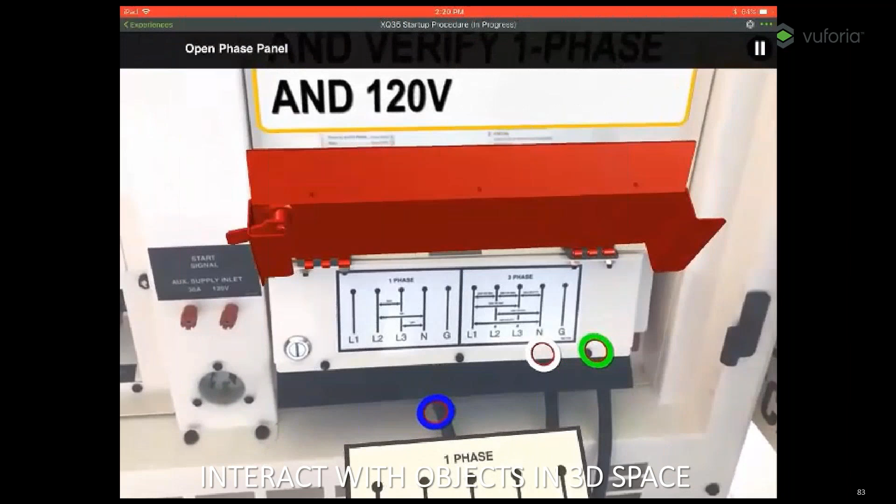There's a generator set, and by using 3D widgets we are trying to directly focus onto this, and there's the same problem over here. Where exactly the problem is, we try to just see the problem area and give the animation experience and take it forward. So there's an interactive object in a 3D space. What we are trying to do is a physical and digital interface for a gen set.

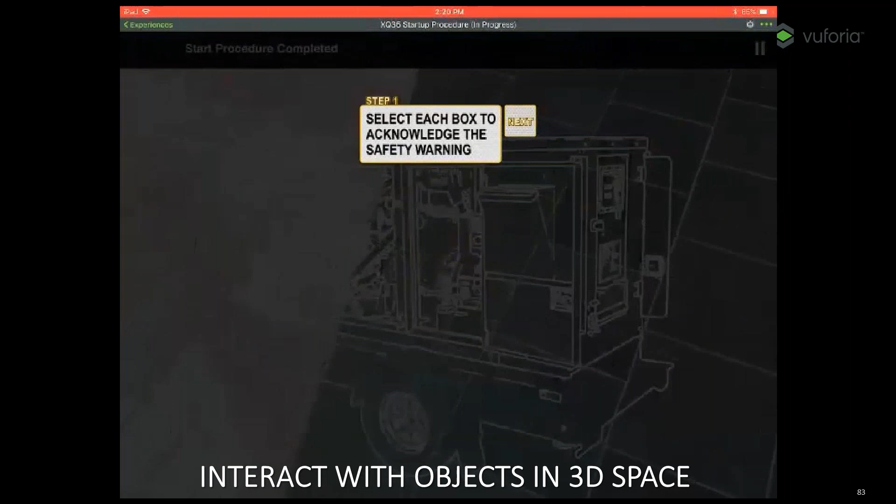So here there's line 1, line 2, and how we are trying to focus it here, you have to move towards this side. So it is trying to guide you to select the voltage handle. You try to just go towards the other side, and now here is the toggle breaker. You have to press this run button. So next go to step 8. We are trying to do one after the other. So these steps are very much possible by using interactive 3D space images. So there's a method that Santosh is trying to explain.

Now there are different outputs like AR tracking, so the end user will access through these tracking options. There are many options, main one is ThingMark, you can see that on the screen. So there will be a spatial target, so you don't need ThingMark in that case. You just have to find a plane where you can position the AR experience, so the component will be placed on the floor.

So visually, virtually, there is one thing called model target. The outline of the model will be used as output, so when you scan that model with the model target, everything will get populated. These are the examples of ThingMark, you can scan it and then everything will get populated, and you can experience that AR, so all the data will come.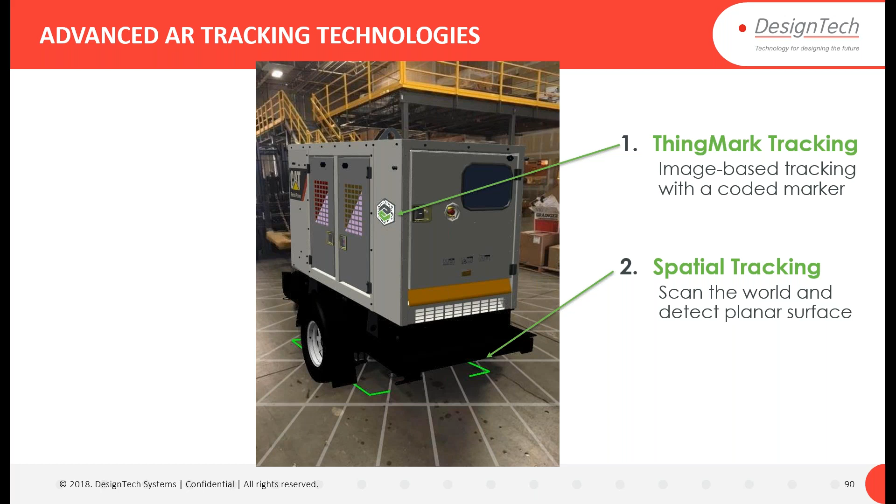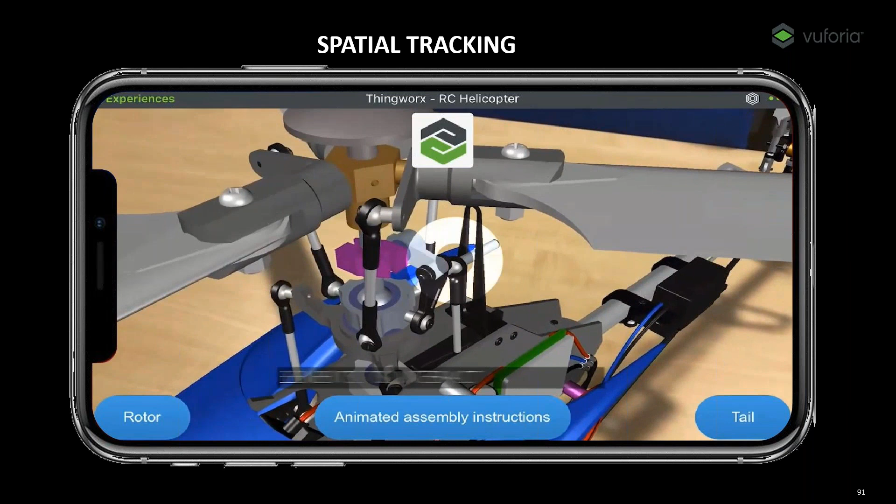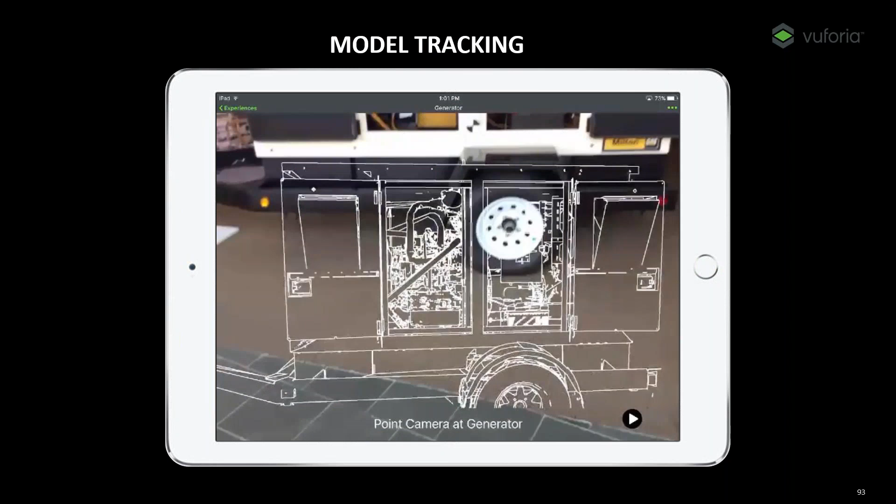So that's an example of spatial target. Now you just find a plane and you can position all your experience on top of that plane. That's the example of spatial target. Now when I go with that model target, the outline of that component will get matched with the physical object, and it will populate the experiences. So these are the main tracking options, one of which can be used by end users to access their experience.

So sometimes what happens is the internet connectivity is not there, then this experience can be downloaded for offline viewing also. So there will be an option to download for offline viewing.

Now Vuforia Studio is available in two formats, like cloud hosted, hosted by PTC, with the cloud space provided by Amazon Cloud, or on premises. So you can create a server on your own hardware. Both options are there.

You can use any of the devices to view the experience, maybe Android or Apple devices, and if you have a complex thing, or maybe if you have the budget, you can go with Microsoft HoloLens for a better experience. And for 2D experience also, you can use this RealWear. So many devices are there, you can choose from the list and experience that AR.

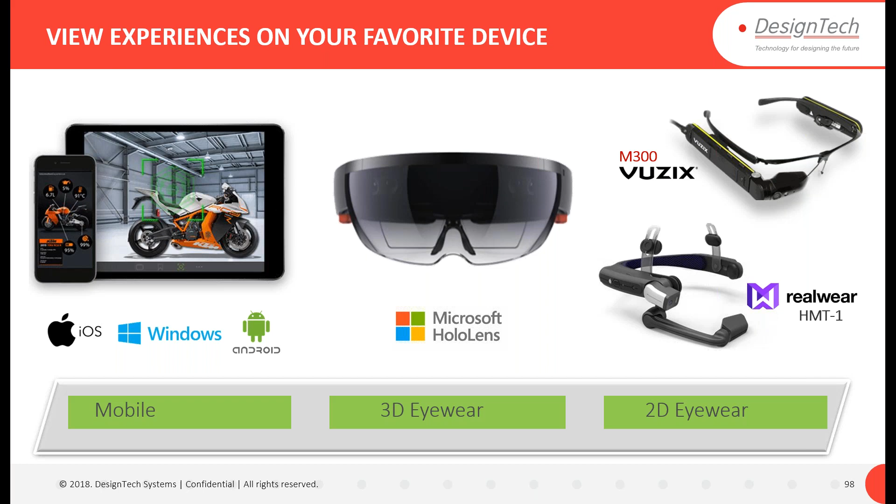So again, why choose Vuforia Studio? It is very easy to create, the fastest way to create an experience. Anybody can do that without development skill knowledge. Even students who don't have much development skill can also create it. In industry also, we don't find many people with development skills, so they can also create that AR experience.

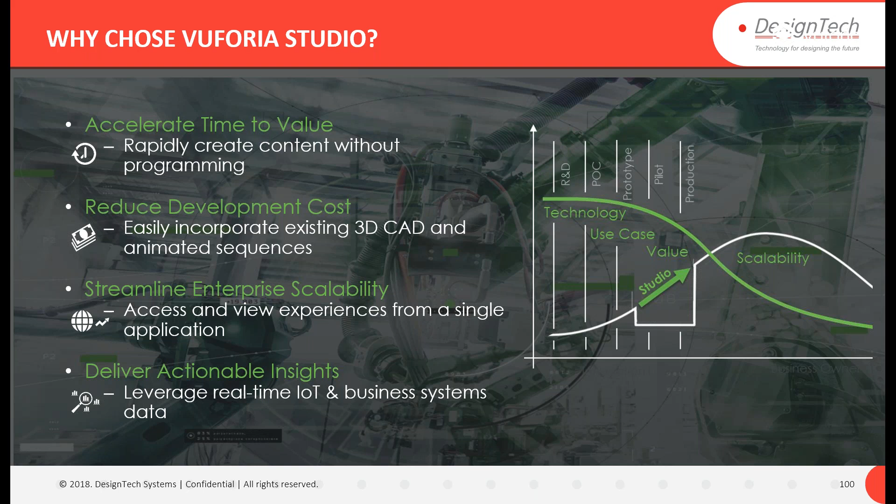So I'll just quickly show a short demonstration.

I will create one short small AR experience. I'll create it for a mobile device, so when I access through my mobile, I can use that experience with any of the tracking targets. I'll just name it Adani, and I'll create it.

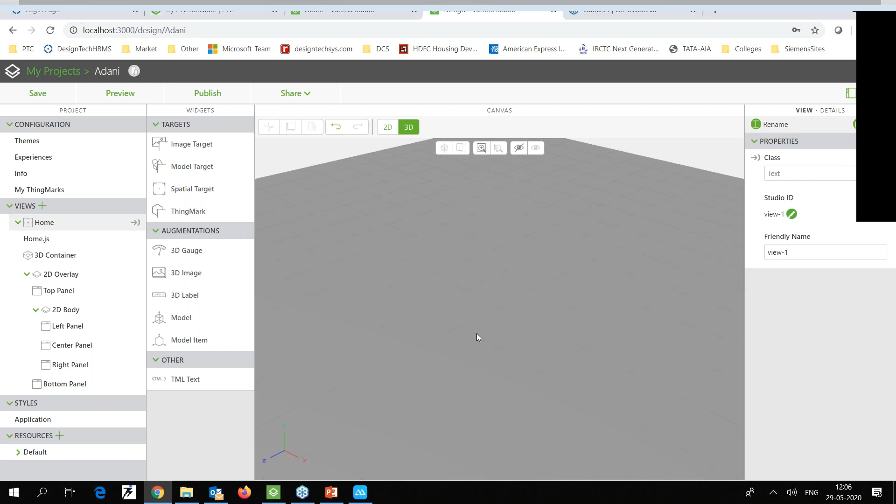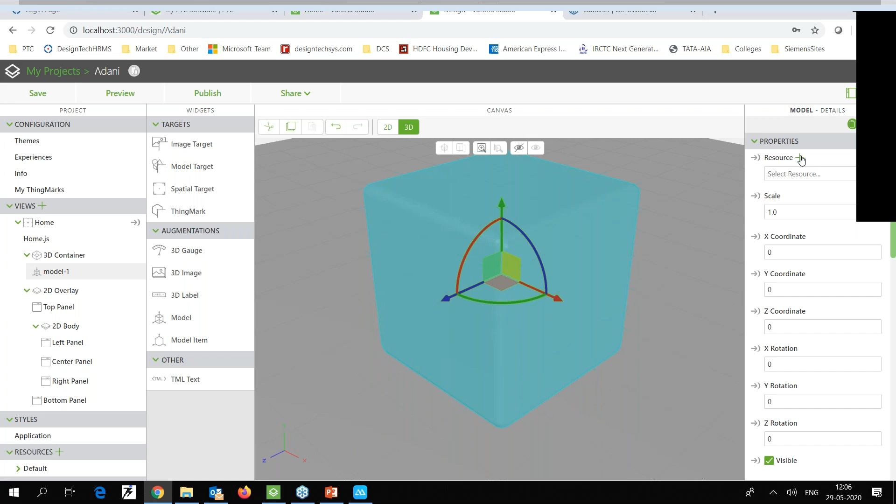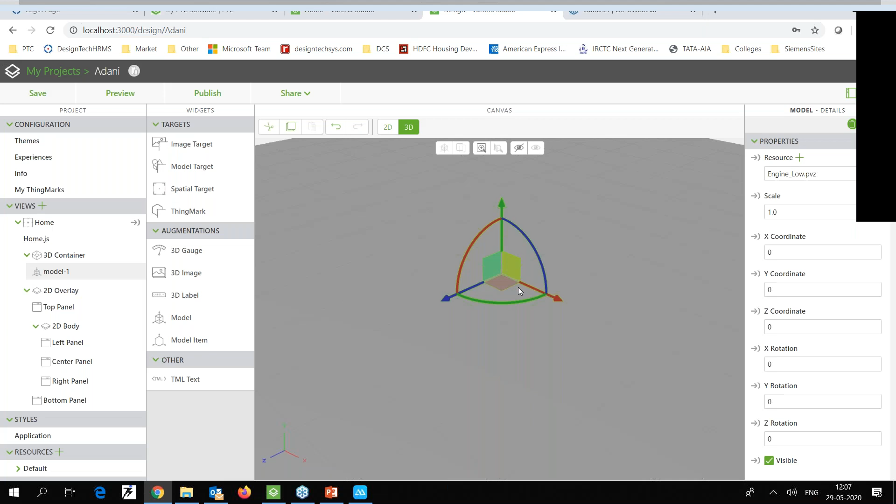Okay, so I'll just add one widget to here I will add that model, so I'll select the CAD file. So I have added a model of an engine.

Okay, so there is an animation inside this. What I'll do, I'll create an interface having two buttons to play that animation and to reset it. And also I will add one widget where that IoT data will come, and you can see that IoT data right on that augmented reality. Okay, so I'll go to this 2D interface and say I will add button.

So as I said, this is very simple, you have to just drag and drop. So I will add two buttons, and I'll name this button to say play, and this button to maybe reset.

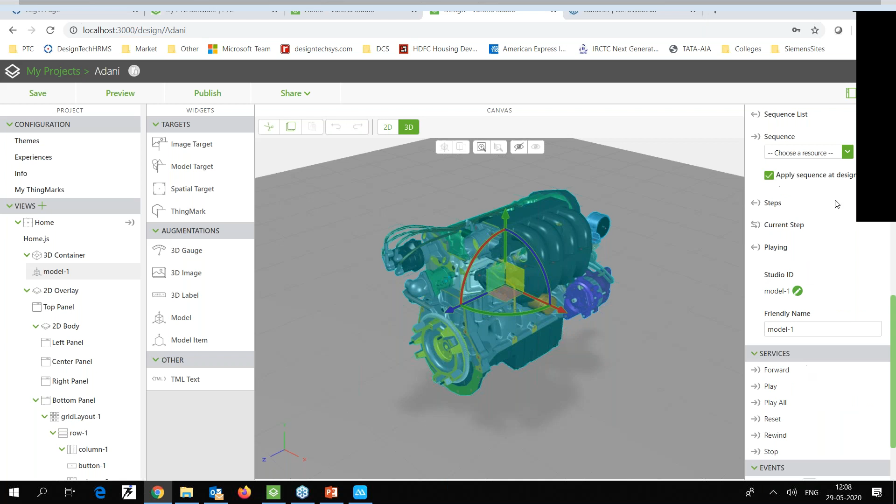So there is a sequence inside this called figure 1. Now what I'll do, I'll go to 2D environment, and I'll just select this button 1, which is nothing but play, and when I click this button, it should play the animation. So I'll click play all, and when I click on this reset button, it should reset this animation, right? So this is the two buttons I have created.

Now when I go to this 3D environment, I will add a 3D gauge, which will display let's say the sensor data and the temperature of that engine.

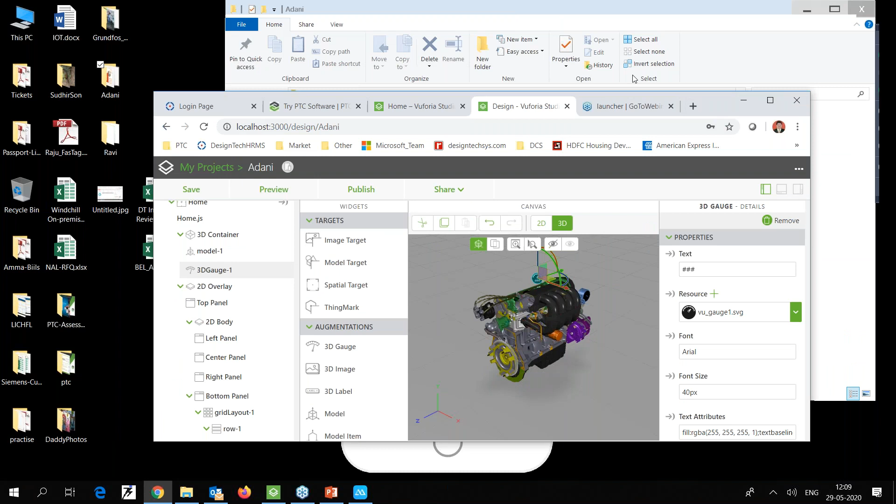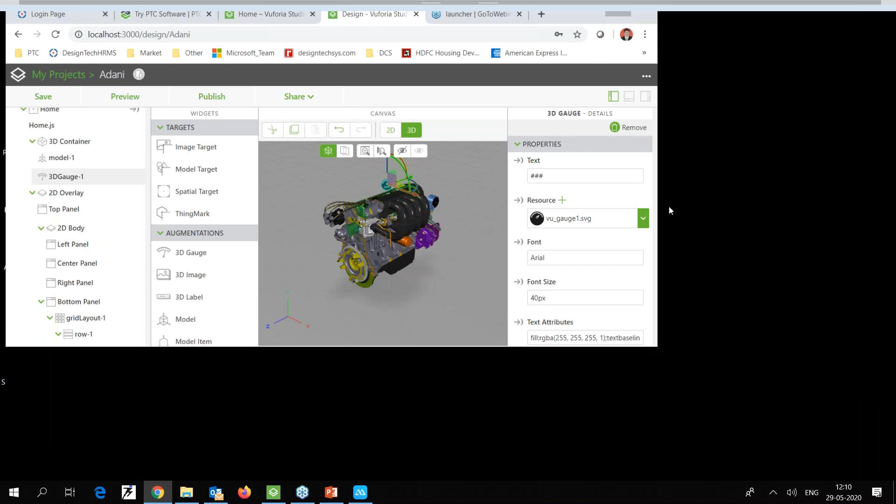So I'll just go to this external data, I'll say car... so login is not happening. So from here you can add that external data, right? And when it is added, then that data will be seen here on that widgets.

Okay, and after that, now you want to publish it for that end user. So what we'll do, we'll add a target, so that by scanning this, the end user can access this experience. So I will go to this experience and say, and here by one click the data can be published to the cloud server.

Now before going for the publish, as I said, we can verify that the experience we have created is up to mark or not. So I'll just go for the preview, and here also we can check the experience.

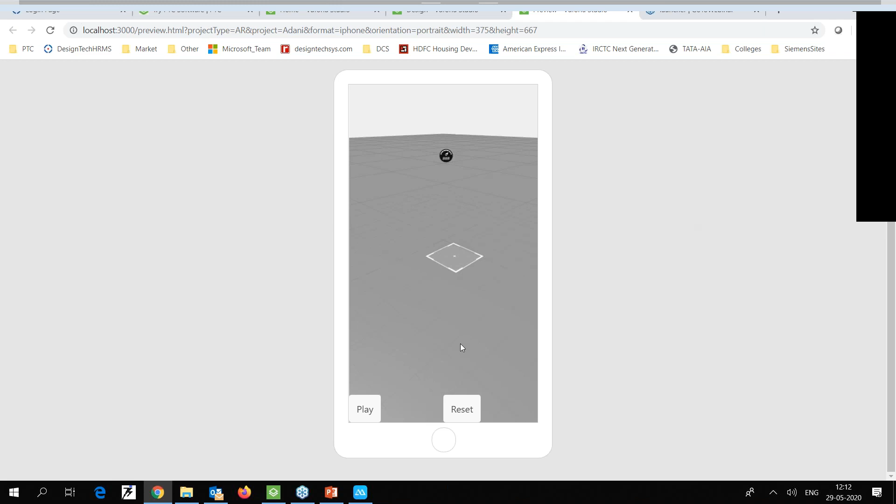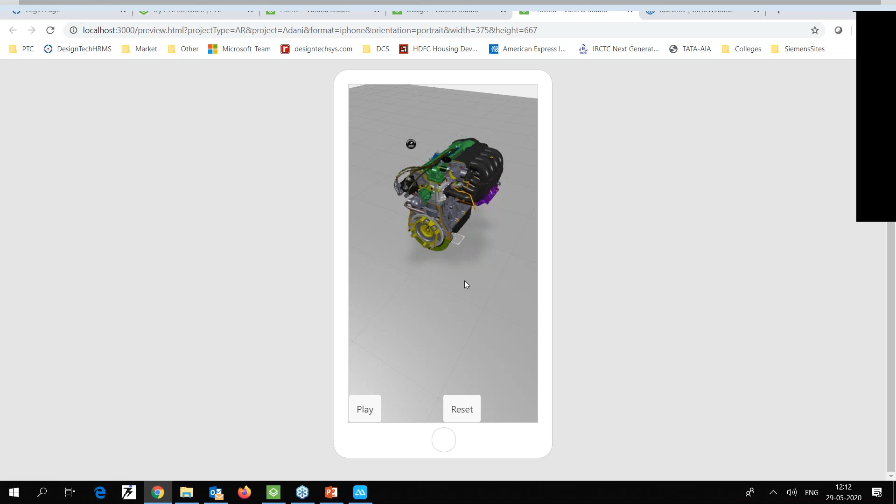Now we can click on play, and you can see that the sequence is playing. Now when I click on this reset, the sequence is getting reset. So this is how this experience or that user interface will be visible on your device.

Okay, so now from here you can publish it, and after that publishing, the end user can view that experience on their devices, maybe Android device or Apple devices or any other devices, right?